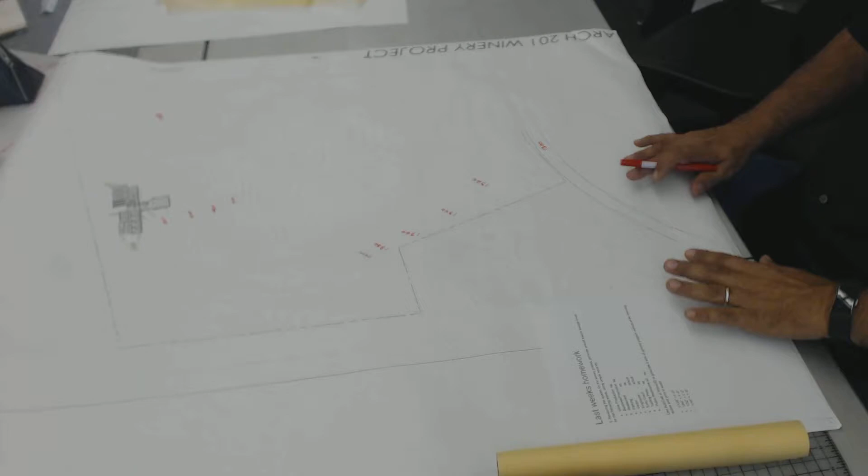So for your homework, you guys are going to have to produce — and I think what I'm going to do, in order to make it simpler on you guys, is allow it to be a very small scale thing. Okay? Do you have your little things you made?

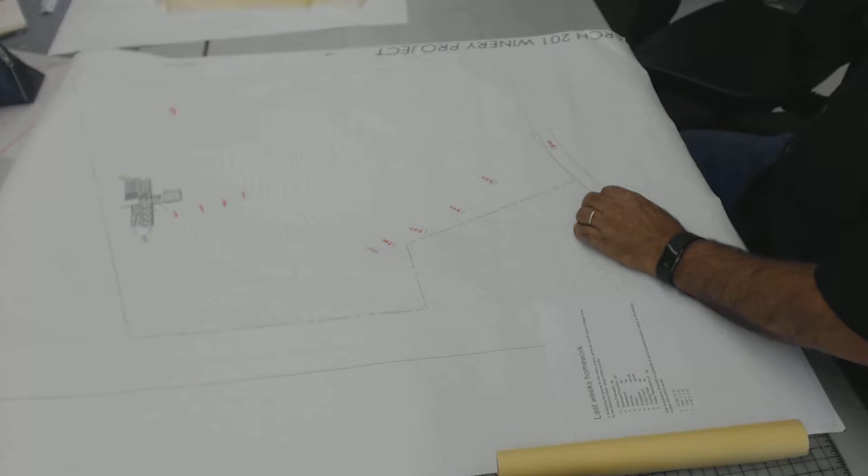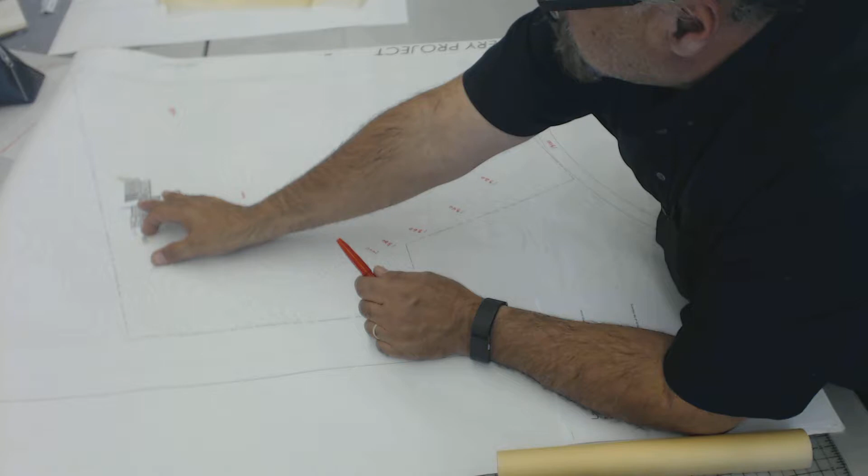What I want from you guys is for you to find where your building is going on the site, and I need you to build a topo model that extends out from your building 120 feet around it. So that's like 2 inches — like that far around your building. In this particular case, this person would be doing a topo like that.

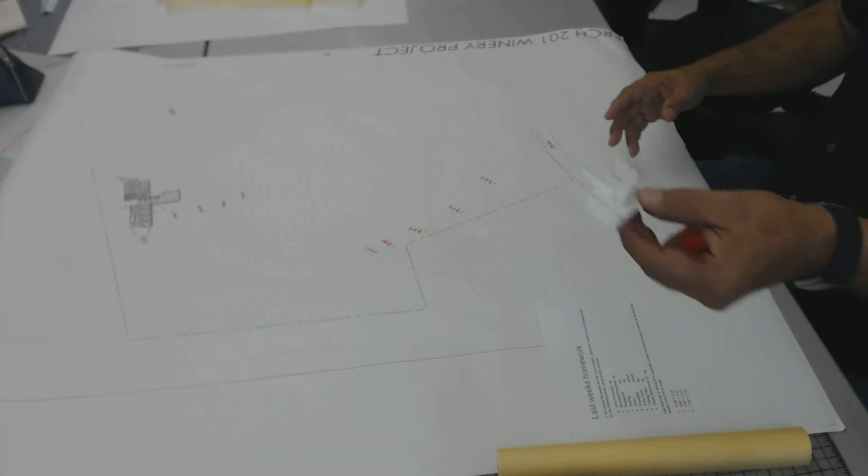The topo needs to have the contour intervals modified for your building, and you should have some form of a small — I don't know if you can see that, I better turn it this way a little more — and I want you guys to have a small massing model of the building at the right size.

So in addition to that, based on the information we've talked about today, if you've got issues with your floor plan, you need to fix them. For all of next week, all I'm going to be doing is giving you guys critiques on your winery and stuff. So this becomes a natural stepping stone for you to go on and build the rest of your design. But the key elements are that you have to know how you're dealing with your site, and you have to know, formally, kind of what your building's going to become.

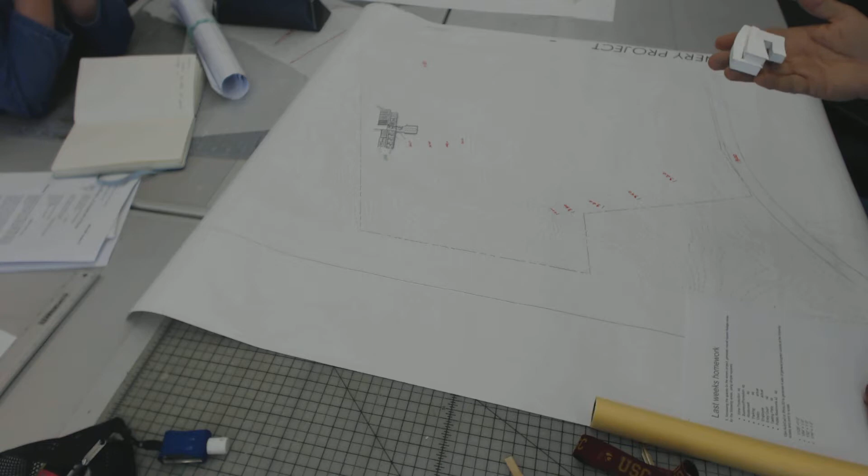All right, questions? Did you have any issues with people's concepts? What would be a successful concept versus a non-successful concept? Look, I'm not looking at metaphorical concepts here. We're looking at a parti, which implies something that's, in my mind, simpler and more of an organizational thing. I'm not looking for a metaphor of any sort. If you want to use one, you can, but so far there were a couple attempts at it, and they really weren't working very well.

There was this idea of a wine opener, right? So what that student did is they drew an outline of it, and then the building became an extrusion of it. That's not what we're looking for, right?

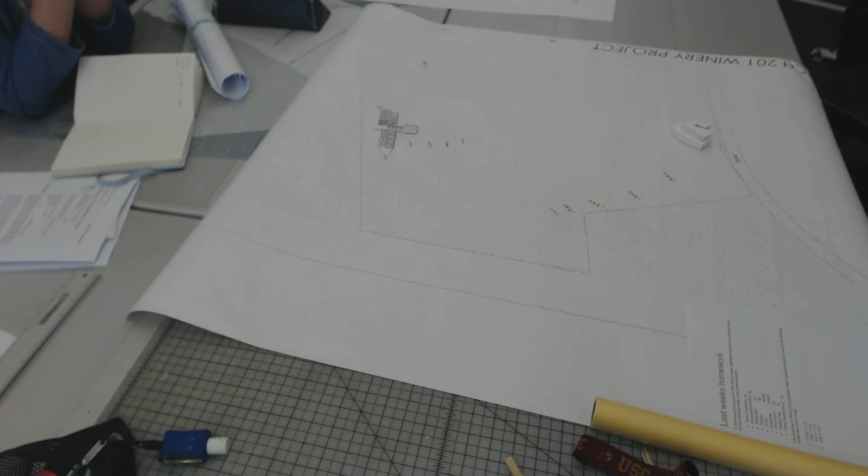Another scenario was the idea of a vine, and how it goes from a trunk to a thinner area and then to a thinner area after that. Well, again, if that turns into 'let's draw a caricature of a trunk and vines and extrude it,' then that's not what we're looking for.

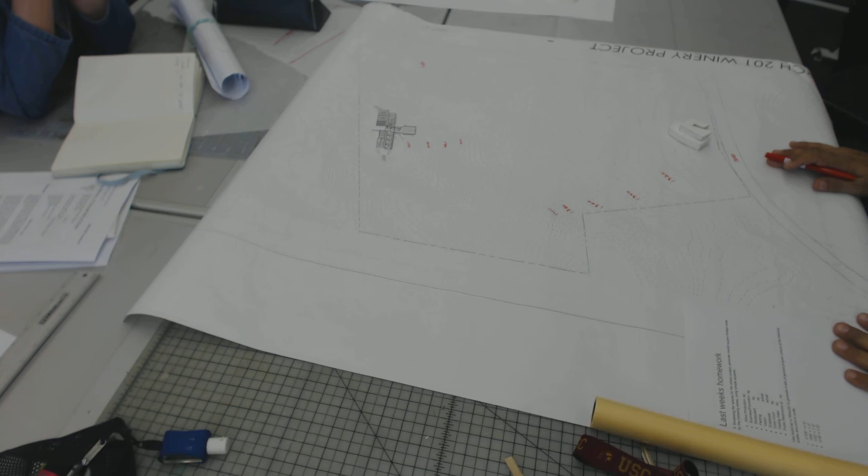So for me, I'd rather say, oh, I'm using a cruciform plan, or a 9-square plan, or a serpentine plan — a linear serpentine. Just do something that is more organizational in nature. I'd be fine with that.